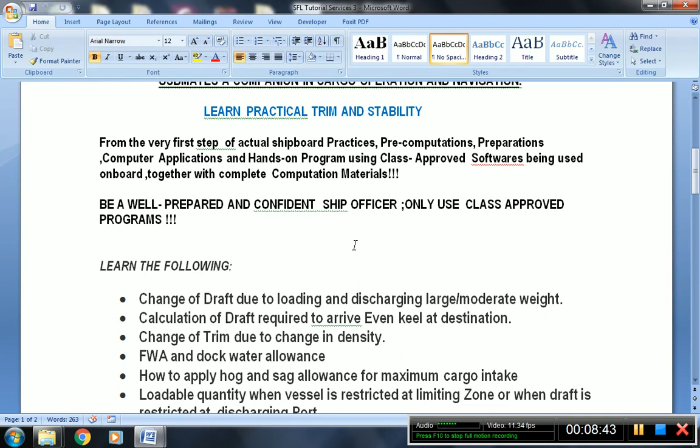So my topic for this afternoon is regarding the calculation of draft required to arrive even keel at destination. Because sometimes the charterer requests you to calculate if there is a restriction at the discharging port, there is a draft limitation. So I have the format being used for the computation. So let's have this

format. Actually, this format is being used when the vessel is transiting the Panama Canal, because in the Panama Canal you are only allowed, if I'm not mistaken, 12.04 meters only. That is the required draft even keel with a density basis of 0.9954, and your draft should be 12.04. So in this example, I just calculate the restriction for a Panamax size vessel. This is not actually in the Panama Canal, but this format can also be used for computation purposes.

So in this example, I have here density at destination, which is 1.0240. So this is not standard. This is the specific gravity or density at the discharging port. So the draft restriction at the discharging port is 13.58 meters. So what you have to do is to find the displacement for the corresponding draft 13.58. So it is found that the displacement against this mean draft is 87,902 metric tons.

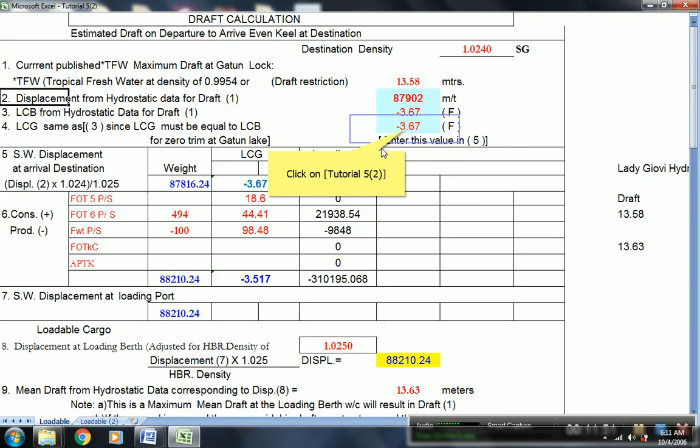So you have to find out also the corresponding LCB on this 13.58 draft, which is negative 3.67, and also the LCG same as number 3, since LCG must be equal to LCB. So you have to affix the same figure, negative 3.67. Now in item number 5, the saltwater displacement. So you have to convert this to saltwater displacement from 1.024. This is 13.58. So you have to correct this one by using this formula.

So displacement multiplied by 1.024, since this is the specific gravity at destination, always divided by the constant 1.025. So the result is 87,816.24. So there is a difference already. This is already the corrected displacement with respect to the density of 1.025. And the LCG, you have to use the LCG here in number 4, which is negative 3.67.

So to obtain the longitudinal moment, you have to multiply this column, the weight column, and the LCG column. The LCG means the longitudinal center of gravity. This is LCG. So if you multiply this figure, the result is the longitudinal moment.

Okay. So this is for the weight. So now your intention is to consume fuel in fuel tank number 6, that is port and starboard. So the LCG is 44.41. That means this is the distance aft of midship. This is 44.41 from the midship.

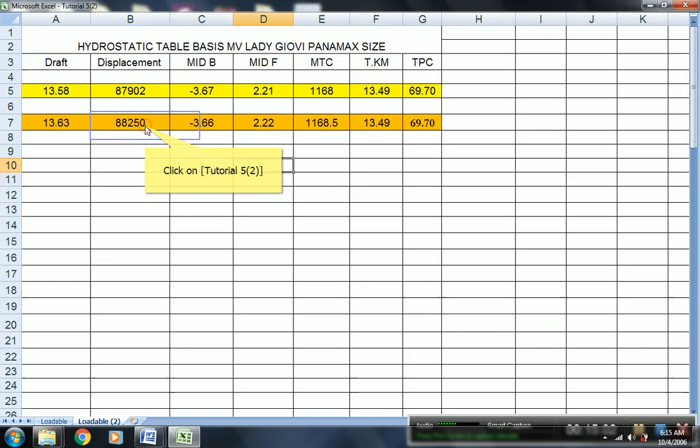Okay. So you have to compute again if there is any correction for the displacement. Since the loading port density is 1025, no need to apply correction. So just leave as it is. So this is 88,210.24. So the mean draft at this present displacement, we will find it out here. So this is the displacement, 88,250, and this is the corresponding buoyancy, center of rotation, the MTC. Okay, so that is the data.

And then this is the maximum mean draft at the loading berth. So if this is your departure draft, this is maximum draft on departure, because this is your mean draft. This is the midship draft. The maximum draft is 13.68 actually, because of the trim. Okay, so if you achieve this draft, you will arrive at 13.58. So you will achieve the restriction at discharging port.

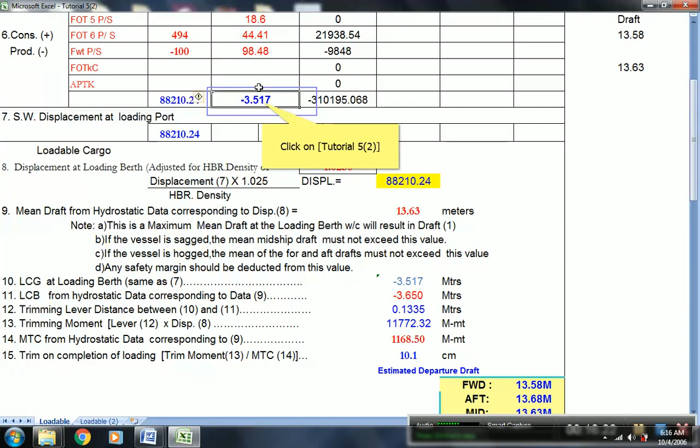Now if the vessel is sagged, the mean midship draft must not exceed this value. If the vessel is hogged, the mean of the fore and aft draft must not exceed this value. Any safety margin should be deducted from this value. So in item number 10, LCG at loading berth, same as number 7. So this is the LCG, because if you divide the total moment by this total displacement, this will give you negative 3.517. So you have to affix it here.

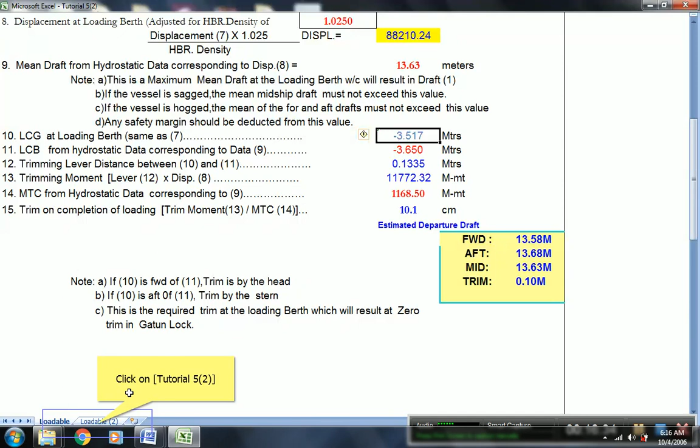Okay, then find the data of the LCB from here. Yeah, that's it. That is the center of buoyancy. So you have to affix also there. Then you get the difference, negative 3.517 minus negative 3.65. Then this will give you the trimming lever distance, 0.1335. Then for the trimming moment, you have to multiply the displacement, 88210, by the lever. So this will give you the trimming moment.

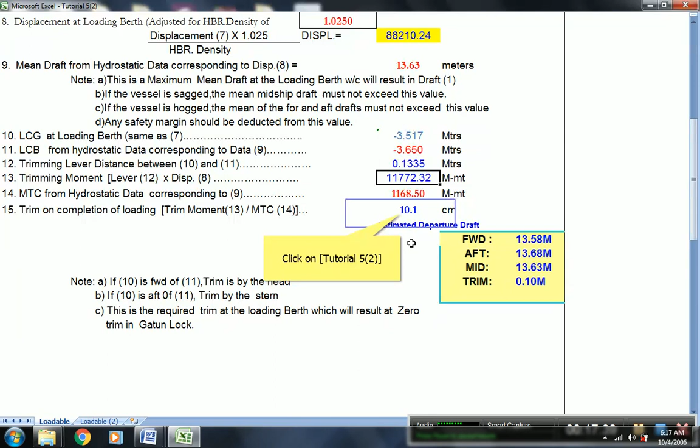Then after that, from the hydrostatic data corresponding to item 9, you have to find out the MTC. So this is the MTC. Then on item 15, trim on completion of loading, that is trimming moment number 13 divided by MTC. So you have to divide this one. Then the result is the trim on completion of loading. So this is your required trim on departure, so that when you consume and produce water at this designated tank, it results in you arriving even keel at destination based on 1024 density.

Okay, so for computation purposes, since your midship draft is 13.63, for your trim you have to divide it by 2 for a simple calculation. So what is half of 10 centimeters? That is 0.05 meters. So 0.05 meters should be added to 13.63 in order for you to get the draft aft, which is 13.68.

Now for 13.63, you subtract 0.05, since you have your trim 0.10 by the stern, naturally, in order to obtain the draft forward, which is now 13.58. So if you subtract 13.68 minus 13.58, this will give you 0.10 meters trimmed by the stern, or 10 centimeters trimmed by the stern.

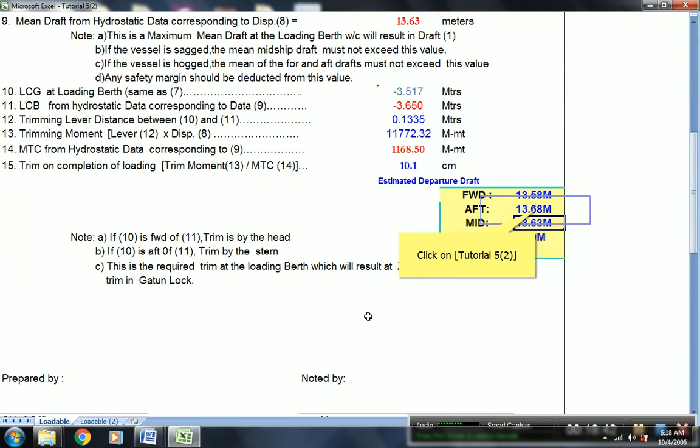So gentlemen, this is the calculation for the estimated draft on departure to arrive even keel at destination. I hope what I have discussed this afternoon would enlighten you, and for sure this would be of great help when you are on board a bulk carrier vessel, especially when you are a novice in your profession as a newly passed chief officer.